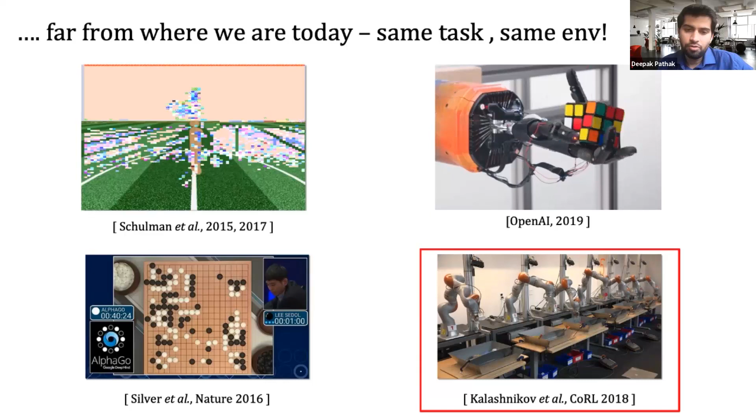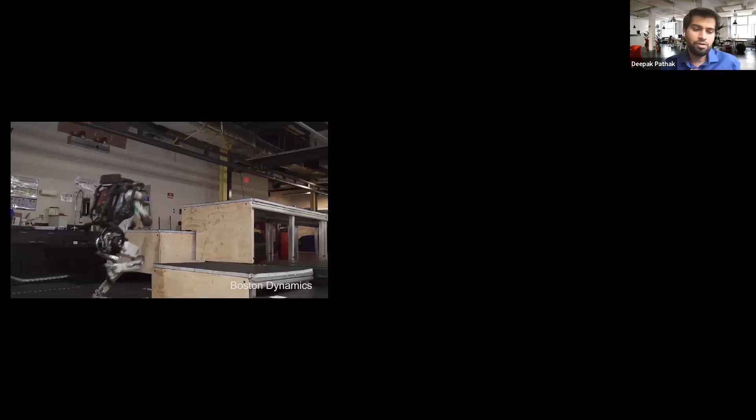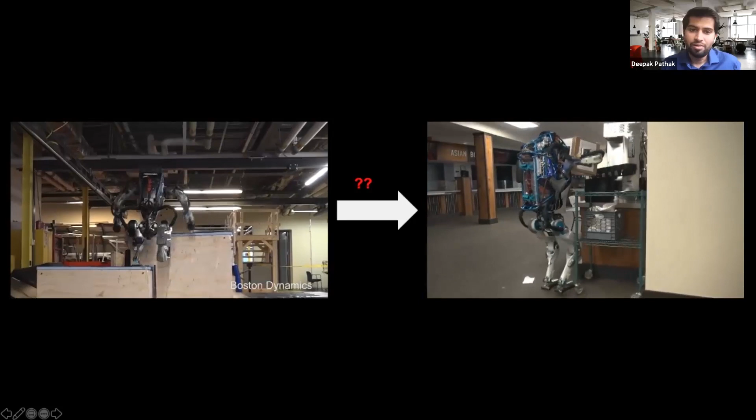And whenever this assumption gets violated, our models fail to generalize. This problem is more apparent and a bigger one in robotics. Extending the same analogy to control, here we have a robot that can do lots of parkour tricks, but apparently fails to generalize to a simpler task of just putting a box on the table. And the failures in robotics are more catastrophic and can cost you thousands of dollars, unlike classifying a wrong image in ImageNet.

So what I believe the major problem is not getting something to train, but to generalize beyond training and have it function in the real world. In today's talk, I would like to argue that probably the only scalable solution to this problem is to keep adapting all the time in a lifelong manner, as is the case in biological agents. We want to go from this current paradigm of training, freezing weights and testing, and then just hoping that things will work at test time.

What we want to do is build systems that can adapt rapidly and continually. In today's talk, I'll talk about some approaches that can go from this paradigm to this continual adaptation paradigm. This basically boils down to the question: how do you computationalize the idea of adaptation in a way that is scalable and practical?

For the purpose of today's talk, let us break down our original goal of solving thousands of tasks in thousands of environments into two concrete subproblems. The first is how do we build agents that function within the same task but generalize to lots and lots of diverse environments. The second focuses on the same environment but generalizing to diverse tasks. This is a very natural separation. If we want robots to be general purpose and embodied, we want both, but breaking the goal into two subproblems helps us study them in a more scientific manner and build algorithms in the first place.

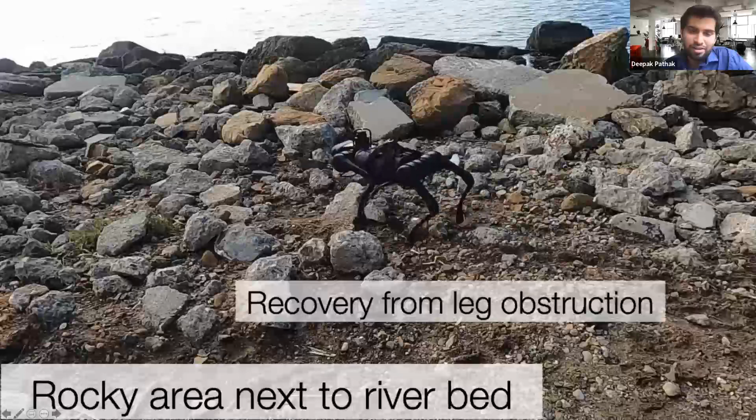Can someone confirm if they can hear the volume? Yes, we can. Okay. I was asking because I put the earphone on.

So here we see the robot walking on the rocky terrain next to the river. And as you saw here, the robot actually was able to avoid obstacles by incrementally moving its leg upwards until it avoids the rock. And I'll come to this more in the result section.

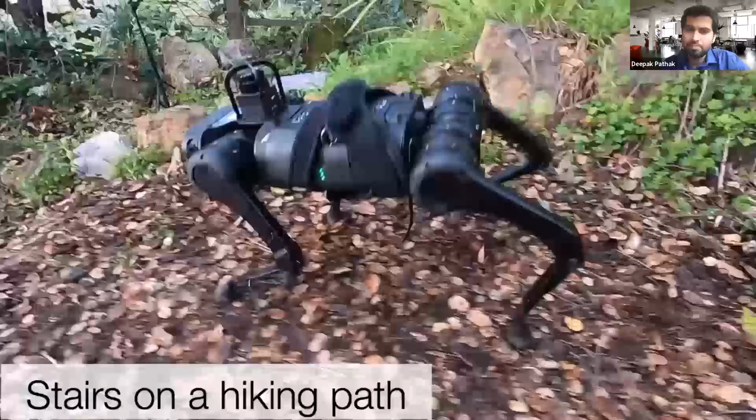Here is one more example of a robot going down the stairs. Note that this robot was never trained on stairs. And this is a test time result where we introduced the robot to the stairs for the first time.

Now, as I said in the beginning, the robot is blind, but even if the robot could see and was not blind, it would still need to adapt to things which are not perceivable. Like if we see this example, the robot has to avoid this dip. So in this patch, there's a certain dip. And the only way to avoid falling from the dip is to be reactive from your own sensor input. And vision would not have helped here.

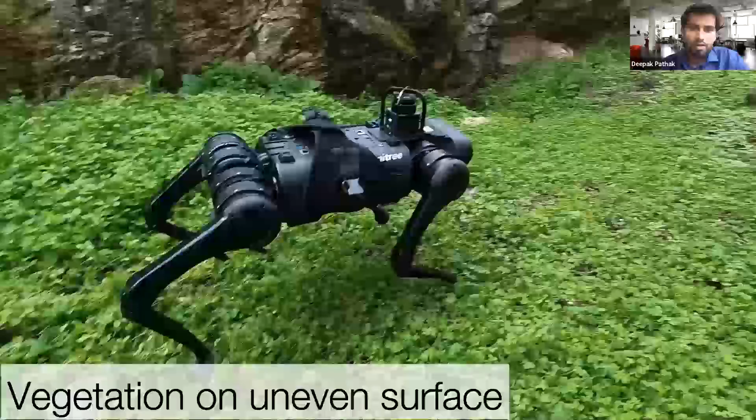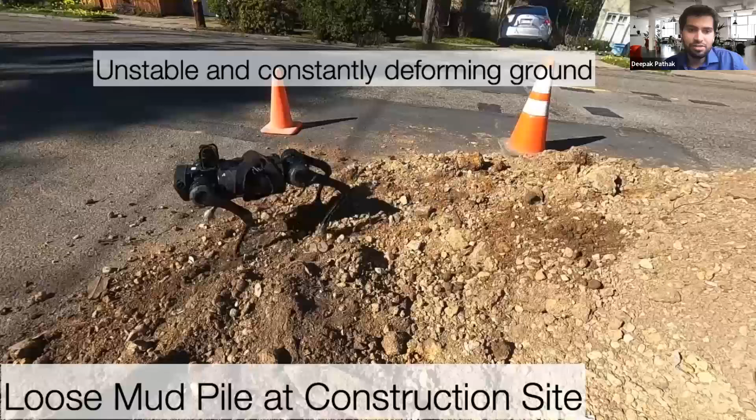Okay, one more example of robot trying to walk over vegetation. One more example where the robot is trying to walk over unstable ground. And you can see this is a construction site and the legs of the robot are very thin. So as it moves, the ground kind of deforms. So it's difficult to adapt in this scenario.

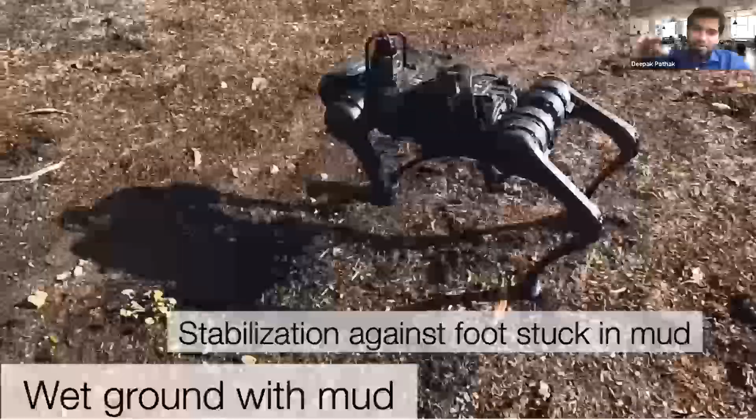Here is one more example where it's walking on wet mud and the mud sinks into the ground as you put your feet into it. So you have to reactively adapt at a very high frequency to such changes. And here is sand. Now, sand is not very hard for humans because we have a very large surface area on the feet, but this robot has a very low surface area. So sand is also acting as a deformable ground.

And finally, to emphasize the point that all the results that we saw so far are from a single policy that was deployed without any modification or tuning directly in the real world. And one funny part here is that in this project, we spent a lot of time in testing. So this whole testing was done during the pandemic and spread over like 2 months in the real world.

Okay, so now let us see what is the key idea behind this approach. And the approach is super simple and straightforward. And the adaptation part is the main interesting portion here. So I'll quickly describe the approach and then we can go to the analysis of the approach. And I can take any questions in between again.

So how does it work? Well, you would like the robot to walk as well as possible. And as I said earlier, the robot is trained completely in simulation. So in simulation, we want the robot to take the current state and its last action, and output the next action that it should take to move forward.

Now, the way we train this robot is so that it can work really well. So we feed it the ground truth information of the ground. So we feed it the mass, center of mass, friction, terrain height, and motor strength, and all those information. And we feed that via a network, which encodes all this environmental information and passes it to this base policy.

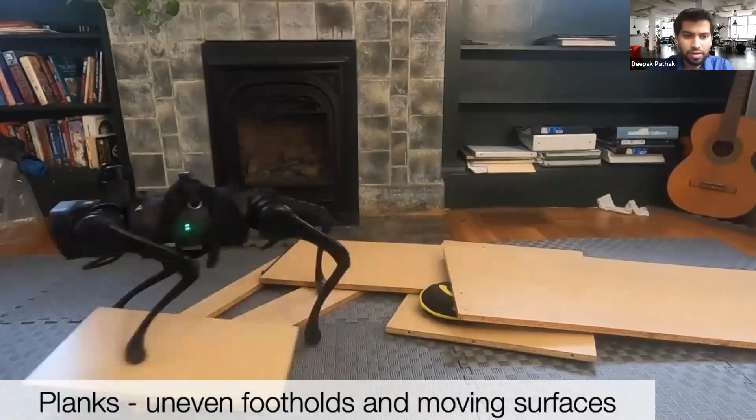one example here is the plank is moving with the robot forward. So this online adaptation is really helpful in these scenarios. One more, here is a mattress. So we put the robot on the bed and it can walk forward. I'll show more, longer examples below. But the key thing in the mattress is you don't get force feedback on the legs, because the mattress depresses as you put feet on it. So this is really a hard task.

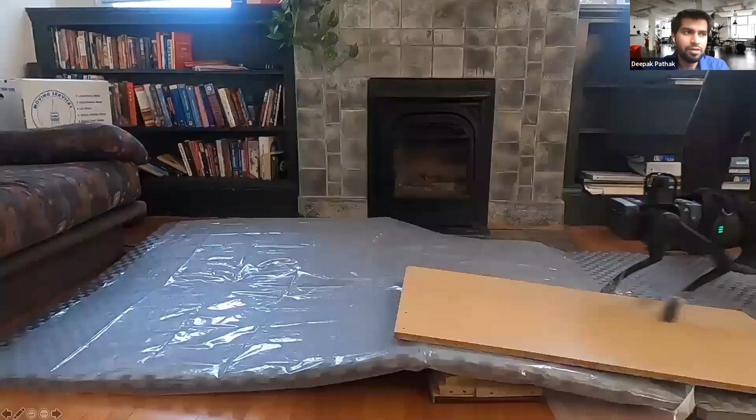One more example here is this robot trying to walk over this terrain. Here is a plank, the surface is oily, and you're throwing weight on top. I'll show each of these examples in more detail with respect to an analysis. But we did a very thorough investigation of this approach and it really works in diverse scenarios.

Okay, so let us see here. Let us first compare this approach to A1's built-in controller. So far I was talking about all learning-based methods, but now we would like to compare how well this method works with a control-based baseline. Now, it is very common in control-based methods to assume a leg motion, a very sine wave-like motion like this, because locomotion is a very periodic thing. So you can actually parameterize it very well.

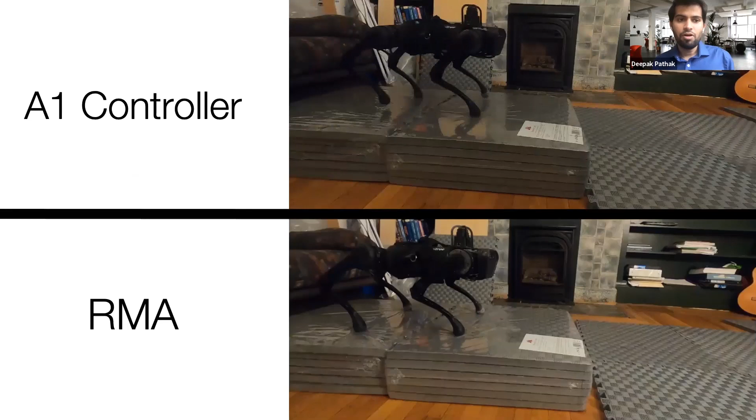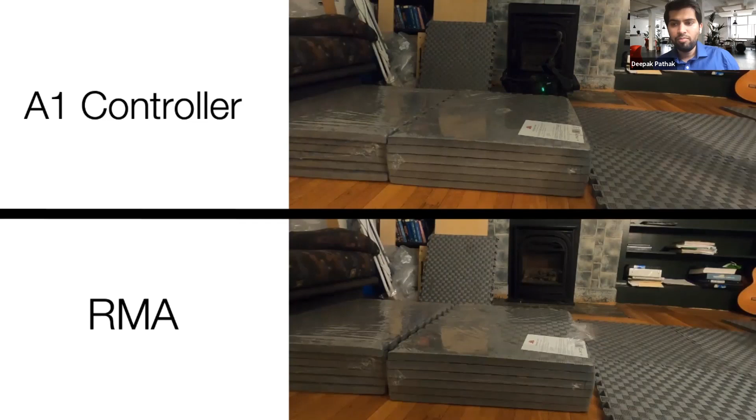So here is the comparison to the controller that comes with the robot. On top, you have this robot; it kind of falls when there's a sudden dip, and bottom is RMA. It also encounters an unstable foothold, but it is able to maintain its balance and move forward. Here is the opposite, you have to go up, and note the robot is blind here.

So that behavior that you saw, it actually learns to move its leg up to avoid it, since it cannot see the obstacle. So it has learned this behavior using the leg as a stick. And here is the mattress. Now you may ask, wait, why is it just jumping around? Because the mattress gives very erroneous feedback on the leg force sensor, which usually completely throws off any classical controller. And here is RMA.

Now this was a comparison to classical controllers, but let us see how critical the adaptation piece is, or is the base policy strong enough? So here the top row is our method, and the bottom row is without adaptation. What that means is we still adapt, but we only find the extrinsic vector once in the beginning and then keep it frozen. In the top, we estimate it continuously online.

Okay, so let us see the testing. The testing here is not just walking, because walking is easy. Walking can be done without adaptation. So here we put an 8 kg payload on the robot.

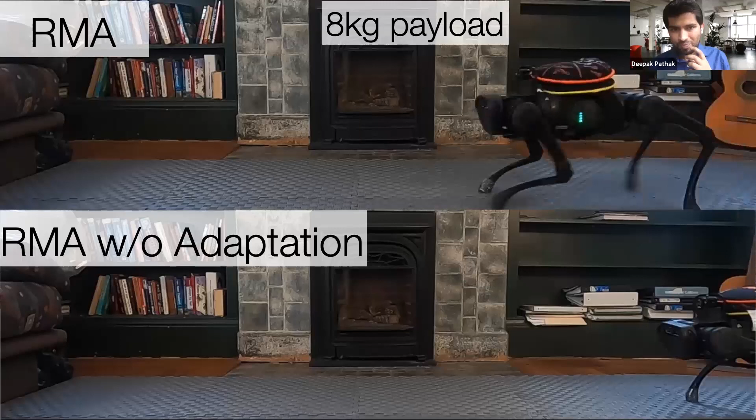Now 8 kg is really heavy. So if you try to walk with 8, so it's not 8 pounds, it's 8 kg, so it's really heavy. And the robot itself is 12 kg. And we did not have this weight on top in simulation. I think in simulation, the range is up to 2 to 6 kg or something. And we are testing already out of the domain in training simulation.

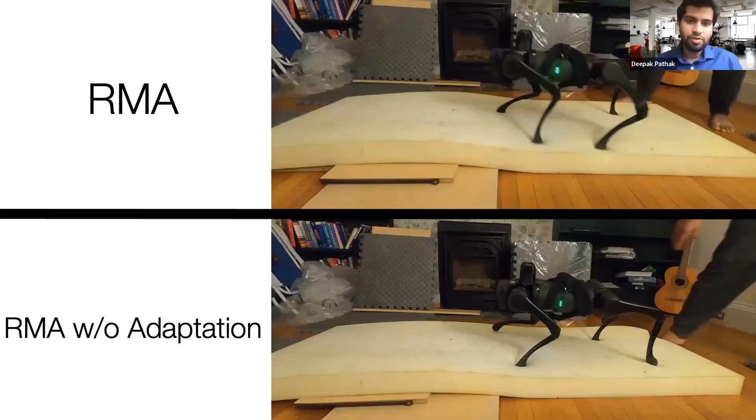And so this is a very hard fall. I don't know if you could hear it. And if you notice, the policy did work for the first couple of seconds, but then since the adaptation module was not adapting online continuously, it failed to generalize. Here is one more result. So it can easily walk on a mattress, but without adaptation, it fails to generalize and kind of falls after a few steps.

Let us also analyze this adaptation module in more detail. So Deepak, do you mind if I ask another question? Yeah, okay. Jeff here again. I apologize if I'm slow in the uptake, I'm trying to make sure I understand. Is the idea that there's no weights changing during adaptation, that the encoder, which is a function of recent data, will adapt the Z code to try to predict what is the Z code of the current world that I'm in? And with that different Z code, the policy adapts to that world, but there's no actual weight changes going on during adaptation.

Is that correct? Correct. The way this encoding goes to the network, it's a dot product. So you can think of Z as weight, or you can think of Z as input. So Z is changing, it's an input. The base policy is not changing. Yes, you're right. And the weights that transform the historical data into the Z vector are not changing, but Z itself is changing. Correct. You could make the analogy that this is a little bit like the Rubik's Cube work from OpenAI, where that network figured out how to internally, within the recurrent neural network, update its assessment of Z. Here you've factored it out a little bit more manually.

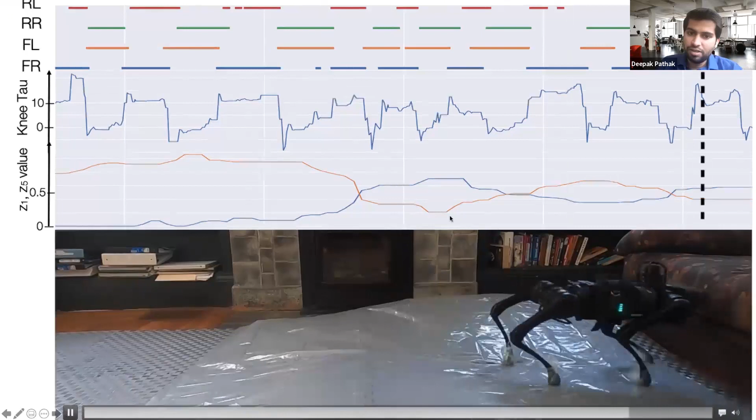And here is to Jeff's initial question about what is Z encoding in the latent space. What we found is that the Z encoding, or this extrinsic encoding, is not encoding the parameters explicitly, but it is encoding some basis of them. So in the oily surface, this is 8 dimensional, we are visualizing 2 dimensions, Z1 and Z5. And you can see as the robot walks, they change behavior. So it is indeed that these parameter values are changing as the robot is adapting, and that helps it adapt to new scenarios.

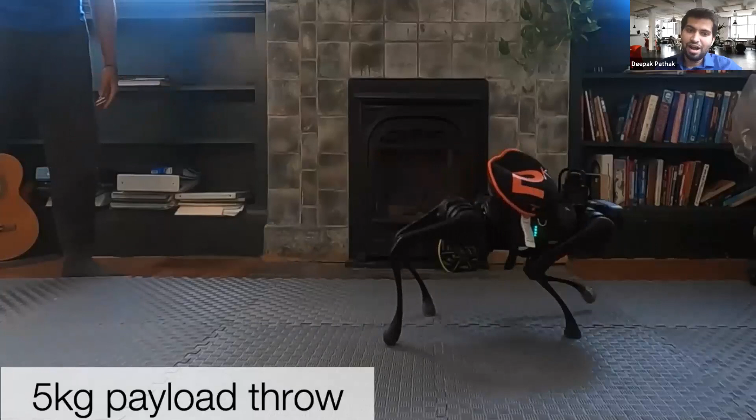So this is one last example here, where we are throwing a 5 kg weight on the robot while it is walking. And note that this throwing behavior was never shown in simulation. And 5 kg is kind of a large weight. So I did this experiment with my students at the lab. While they're walking, I didn't tell them that it's 5 kg. I just threw it at them, and they were actually quite surprised how hard it is to catch while walking. And here it is in slow motion.

So notice how the robot bends down when the weight comes on top. And again, this behavior is in a way emergent, because this throwing is happening at test time, and the objective of not falling has led this to happen. So here we are visualizing some other values like Z2 and Z7, and you can see the change in their behavior as you throw it. They both are similar in the beginning, and as you throw the weight, one becomes high, one becomes low.

Okay. So now quickly to summarize. I think Jeff mentioned the hand work, that is definitely one of the works. But even in the locomotion community, there's a lot of work done over the years. For instance, work in control for locomotion, learning for locomotion, also sim to real for locomotion from this lab, and adaptation, meta learning, and all that.

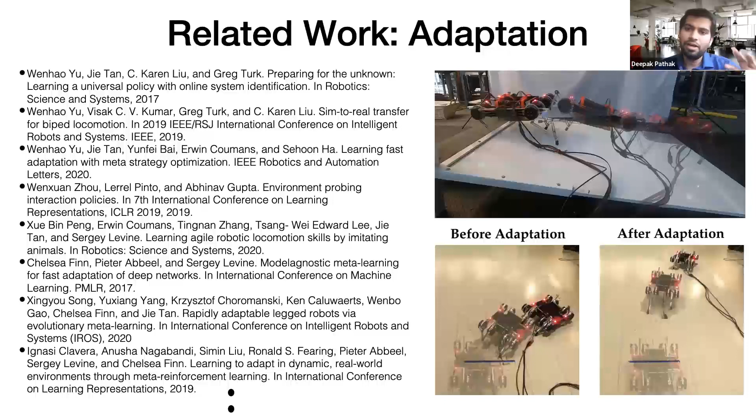So we compared this method to different types of approaches, like domain randomization, where the idea is to be robust across all environments, and system identification, where you don't have a Z vector and you estimate the exact friction and all those values at test time. And also other methods that adapt at test time, but they take more samples, like 3 to 5 minutes of data. This is like Jason Peng's work, for instance. And it turns out that RMA works much better compared to all of these approaches.

And we did the testing not only in simulation, but also in real world very thoroughly. And I would like to emphasize that the testing was done in real world, to an extent that the robot broke multiple times while testing the baselines. But this is what I'm a big proponent of: we should be doing full thorough testing in the real world and not just in simulation.

So in the context of all this prior work, what is exciting about RMA? I think the most exciting thing personally for me are these 3 points. One is this adaptation happening online without having any hand-coded or heuristic control stack at the bottom. So we are not assuming any predefined leg trajectories or motions. Then it can generalize to new terrains with limited training. And then this asynchronous design, this 2-phase design, which allows us to run this in low compute scenarios.

But focusing on the first point here, so just a question. Okay. So yeah, it's also about the first point. So why do you think a hand-coded heuristic will be harmful to your task if you use it, or why is it beneficial to not use a hand-coded one? I'll just come to it in a couple of slides, I think the discussion will answer it automatically.

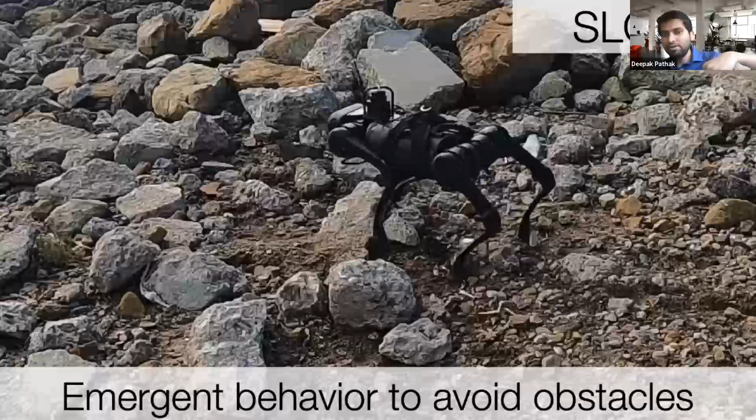Okay, thank you. Okay. So here, since the robot is blind and it does not have any foot patterns or any pre-hand-coded thing, it has learned this behavior of avoiding obstacles by slowly moving the leg upward. So this is one of the benefits of not hand coding. If you look at it in slow motion, the robot has actually learned to slowly move the leg upward while it avoids the obstacle. And we found that this behavior is very consistent across environments. So here is one more.

Okay. I have a follow-up question on that. I'm not sure if you're aware of ETH Zurich's work that's similar. I believe they're using a predefined sine wave for the leg, and they can deal with this scenario pretty well. So I don't see why that would be a problem.

Oh, so I think in their case, the robot is actually very high. It's a big robot. And by the way, that work is great. I'm really a huge fan of the work, so nothing bad about it, I have only good things to say. But still, they can avoid this because they have very high clearance. And when you have very high clearance, your gaits are really energy inefficient.

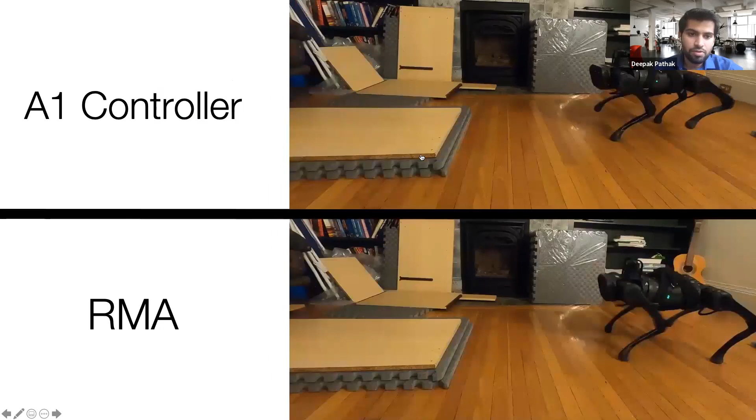For instance, look at this example here that I showed earlier, on the top. I can play the video. With this kind of gait, if you have high clearance and the obstacle is not that high, then there's no problem. But if you have an obstacle which is higher than this, then what will you do? There is only a limit until which you can avoid the obstacles, right? So in their case, I think the obstacles that they show are mostly where the clearance takes care of it automatically.

Anyway, the right approach here is neither theirs nor ours. I think the right approach is to have vision and avoid the obstacles intentionally rather than via these heuristic mechanisms. But the bigger reason for us not hand coding things is not really these practical reasons, it's more of a philosophical one.

What we were really inspired by is work on studying locomotion in babies. For instance, there is this work from Karen Adolph, a professor at NYU who studies locomotion in babies. She's a world authority on motor development in kids. She's also the student of Eleanor Gibson, who did the famous visual cliff experiment with babies, and who was the wife of J.J. Gibson, a huge authority in computer vision.

Now, one of the papers that I really like from Karen Adolph is this work studying locomotion in kids, where she argues that the locomotion patterns in kids do not fall into a predefined notion of gaits or leg primitives. In kids the locomotion is more general, and there is no stage in their development where these regular patterns are there, which is a surprising result because it is countering 100 years of work in biomechanics, where people have completely focused on gaits.

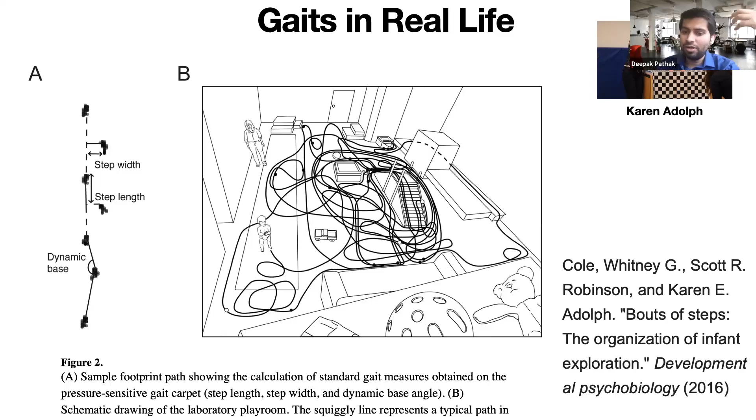And also we kind of know that this is not completely true, because in animals we have seen very structured gaits, like walking, amble, pacing, trot, etc. And this has been studied very well in horses, where these gaits emerge. So there is kind of a mismatch; both of them are natural behaviors. In babies, we don't see those gaits in complex environments, but in horses, dogs, cats, elephants, we see these gaits. So how do we reconcile both of these stories from a scientific point of view under the same framework?

Now, one point to note is that whenever these gaits have been studied in animals, they have been studied in the context of flat terrain, where these gaits are structured, while the argument from Karen Adolph is about uneven and complex terrains, where the gaits are unstructured. And what we would like to do is reconcile them in the same framework.

And one way to do that is to basically hard code the gait. But if you hard code the gait, as someone asked in a question, or foot patterns, it is very difficult to reconcile this story. How do you get unstructured behavior in uneven terrains, right? So before we reconcile the framework, let us take a step back and think, why do these animals have these gaits in the first place? What is it about them that makes them show such structured patterns?

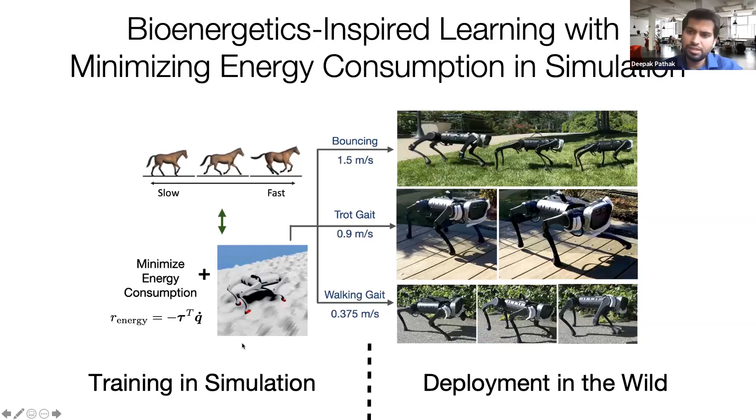Okay, so it's the same scenario, but in the first example we are training on a simpler terrain. Note that this terrain is not as complex as the earlier one; it's almost flat with some bumps. And here are examples of the gaits that have emerged. Note that if you see the gait pattern here, it is not unstructured like the RMA I showed before. It's actually a very regular walking pattern. But these gaits have emerged here and are not hard-coded.

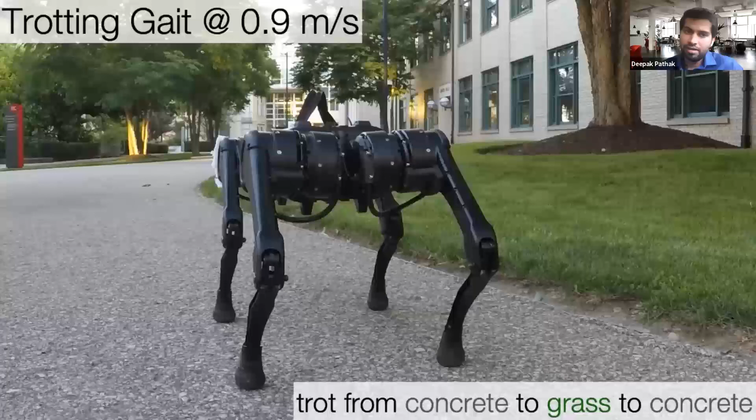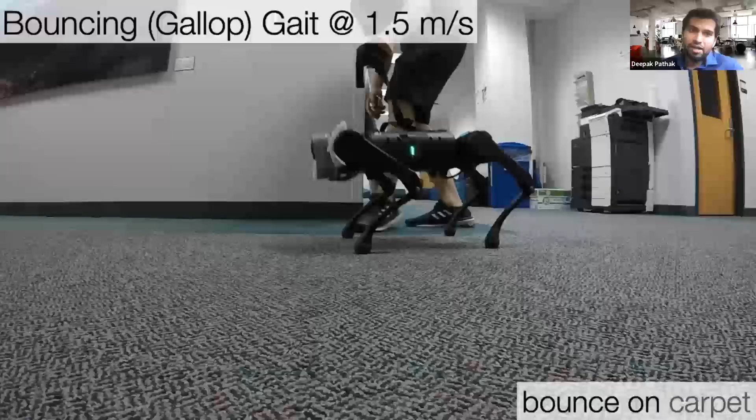Now, if you take the same algorithm and change the speed, same thing, no change, just change the speed, the gait is different. So now it's trotting, where the hind legs track the front legs. Again, if you change the speed to even higher, it starts bouncing and galloping forward.

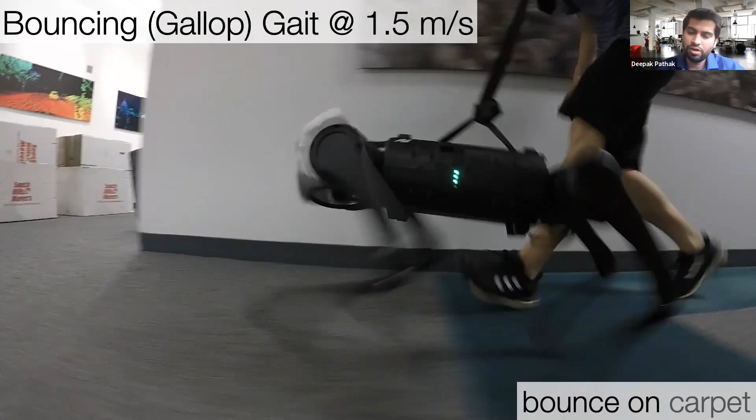Now notice that one can hard code these gaits for different speeds manually, but that's not the goal here. Right? The goal here is something that automatically changes gaits as you change the speed and is emerged from scratch. And I hope that this kind of answers the question that was asked about pre-programmed gaits.

One interesting thing that we found here is that the flight phase has emerged in this robot. So if you see this robot, it's completely in the air. And this is something which I found out later that controls people really appreciate, like this gait of all being in the air, because it's very hard to get, where you have all feet in the air.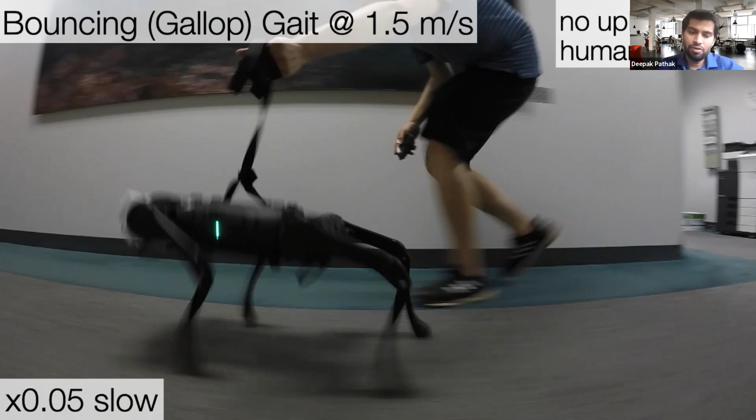And here's a quick illustration. So at low speed, it walks. And here we are showing the classical way of showing gaits, like foot patterns in a graph laid out in a 1D series. At trotting, it's a different gait. So let me skip this in the interest of time.

Just a quick question, if you don't mind. So what energy metric are you using here? Because there's a variety of different energy metrics. I think we are using work. There's true mechanical work. There's positive mechanical work and negative mechanical work. Have a field day with all this stuff. Yeah. So we did the simplest thing we could implement here.

So we did pure mechanical work. So we just minimize the mechanical work done by the robot. So it is not counting the electrical compute the robot is using, which I think is what biomechanics prefer, or they call it, like, transport energy or dimensionless energy term. So the negative mechanical work, does that count against the energy objective, or does that count as energy stored that you can then use again?

And so we are basically computing, I think, the dot product of torque and the angular velocity. So you minimize that for all the joints. Okay, and that's integrated. So that can be negative. So in principle, you can store that energy somewhere. And that's the drawback in some sense of using pure mechanical work.

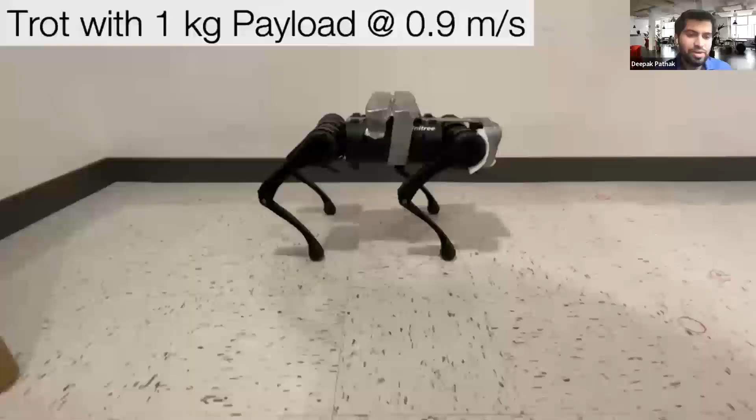Okay. Here are some examples of these gaits. Here we see the robot trotting through this scenario and moving forward. We also did the same testing as before, but at this time I had moved from Berkeley to CMU, so we did not have the same weights. So we became creative, and we put filled water bottles taped onto the robot to have this payload on top. And the gaits are consistent and robust to all these variations.

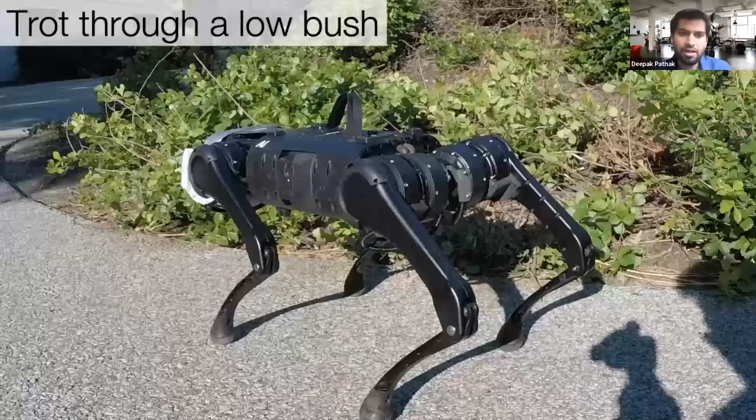Here is one more trotting through the bushes, one more bouncing through this. Now this is actually very high speed, so the robot goes away very quickly. So the student has to really jump around with the robot.

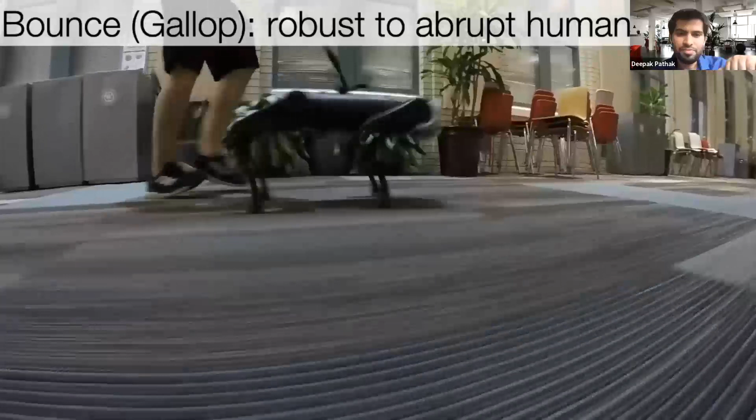And here the student is pulling the robot sideways and also pulling it upward. So if we see here, even when you pull it sideways, it's almost tilted, it can maintain the gait at such a high speed. And then similarly for pulling upward as well.

Now, if we repeat the same experiment on complex terrain, like here, in this case, and it is also argued by other papers in animal locomotion as well, that in complex terrains, the horses, dogs, sheep, they do not display structured gaits. They only display structured gaits on flat terrains. And here we do the same thing.

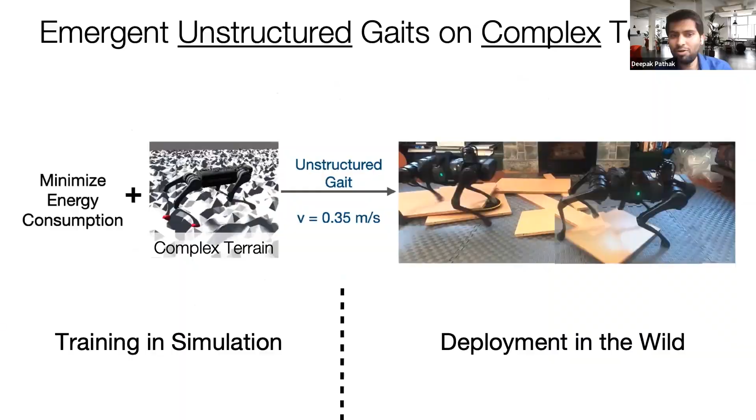So now maybe I have a question here: should we go with part two, which I think is much shorter, or should we just focus on this and have it understood in more detail? What do people want? Let's see. Yeah, I mean, it's the usual Zoom dilemma. I think there will be people who have hard exits and others who don't. And Aaron, as far as the recording goes, does it matter for you? No, we can go as long as you're available. Yeah, but let's try not to keep it too long, I guess. Thanks. Okay, so let me just do it real quick.

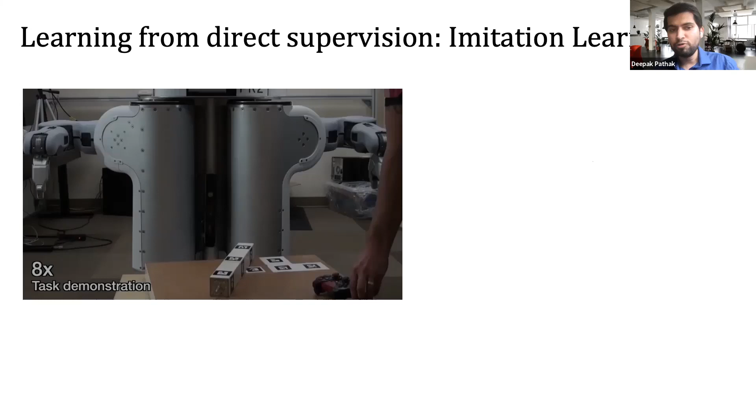So this was same task, diverse environment, and now focus on same environment, diverse task. I'll go super fast on this, but stop me if you are not following something. Before I talk about diverse tasks in the same environment, let's consider how we train an agent to solve a single task in the same environment. The most common approach is imitation learning, but we all know its drawbacks: you have to collect data, it's tedious for the expert, and this has to be repeated for every new goal the robot is given.

Furthermore, other approaches like learning from a reward or cost function, like RL, have the same problem. You have to design the objectives and reward function again and again for every new environment. So if you really want the robot to generalize to a diverse number of tasks, it would be most ideal if the robot can discover those tasks on its own, kind of like self-supervised learning. And this is the focus of one of our recent works, where the problem setting is we want to discover tasks at training time and then learn how to solve your own discovered tasks.

And then at test time, the hope is any new task the user gives you, you would have discovered already at training, so you can just do it at test time directly, zero shot. So it's unsupervised task solving without any supervision, neither at training nor at test. This problem of unsupervised exploration has been studied a lot, including my own past work like curiosity. But the major problem with all those methods is twofold.

One is, even if you can explore very well and get the skills, there is no easy way from that unsupervised exploration to actually solving goals at test time. And second, the exploration itself is very limited. Let me show you a demonstration of why that is the case. These are examples of the most pervasively used methods in exploration, like goal generation, self-play, counts, curiosity, and all this.

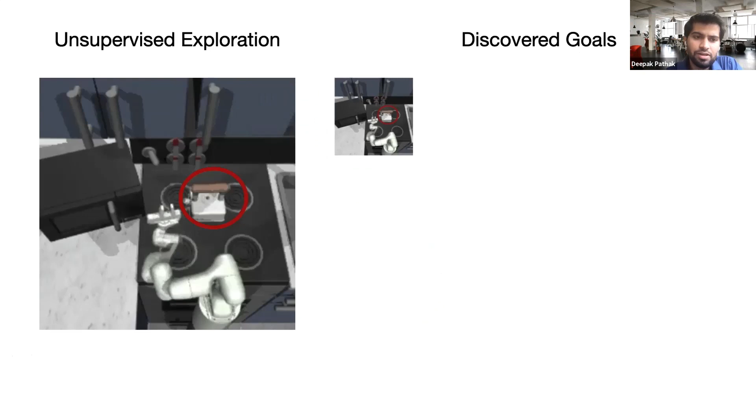So let me quickly show you some results here. So here is this complex environment where this is again all torque joint angle control. So there are no primitives, etc. So this is a hard problem in this environment, to do anything like move the kettle or open the microwave. And here is a demonstration of the exploration trajectory. So here the robot goes and opens the cabinets completely on its own. It opens the microwave, turns on the light, moves the kettle and all that. So it discovers many goals during training.

Then at test time, you can have the agent perform different tasks, and you can give it a diverse set of goals. So for instance, the nice part here is that we train a single policy only once, but at test time, we give it lots and lots of goals to achieve. We can ask it to make shapes with the body, organize the blocks, or open cabinets, or do other things. So let's see one example of this task here.

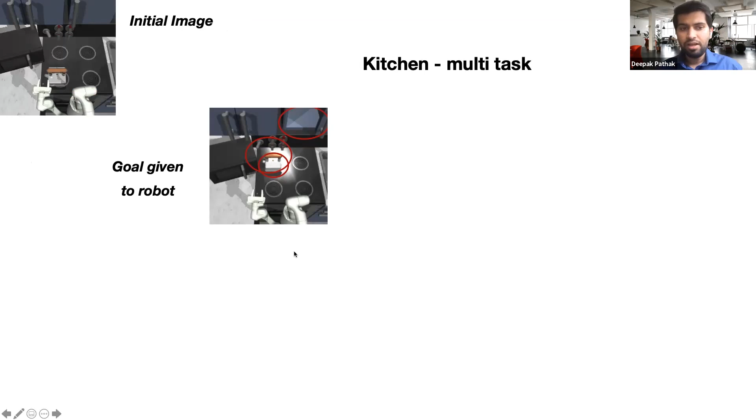So this is the initial image, and we show this robot this goal image. And in this image, the cabinet is open, the light is on, and the kettle is moved. Note, the robot has never been supervised, neither at training nor at testing. And it sees this image, and it tries to match its current image to this goal image. So in doing that, it moves the kettle, it turns on the light, and then it opens the cabinet.

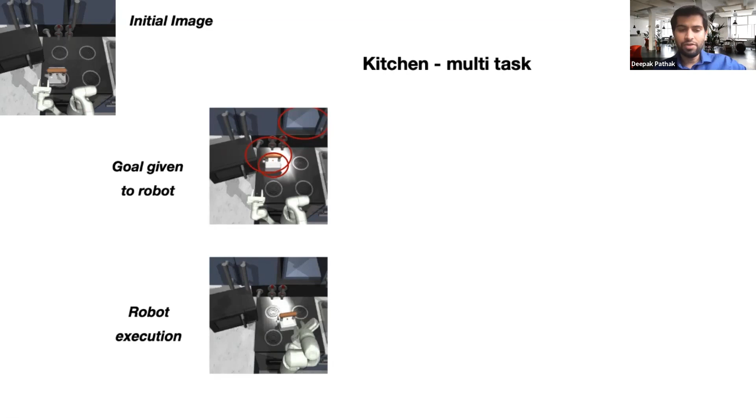And this is completely zero shot. And this is like thousands of actions to be done in sequence to figure this out. And okay, it can also work in more environments.

Can I just ask a quick question on that? So if you have a cabinet with a small handle and you have no idea that a handle is an affordance, then it's going to take a lot of random motion of the robot, like years, presumably, before you discover that if you put the gripper through the handle and then you pull, it opens. So aren't some of these things a little bit too much like looking for a needle in a haystack?

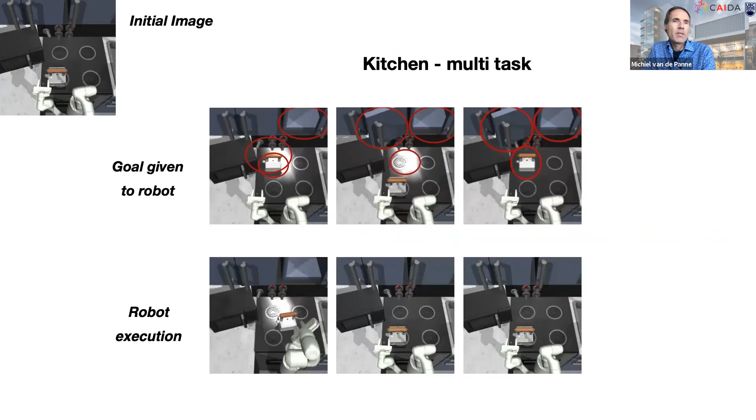I totally agree. The way I think of this work is it's going beyond the current exploration methods, including my own previous ones, in being able to discover goals in these complex environments. For instance, I have not seen a result in this kitchen environment, which is actually a complex environment in some ways, which does not use demonstrations or very shaped reward functions. This environment is already hard with shaped reward functions and demonstrations.

So I don't know what the limit is. I know that this approach is not there. If you have a very complex environment, it's exactly like discovering a needle in a haystack. So it might not generalize, but we are still trying to figure out the limit of this approach, how far it can go. But I bet you Go Explore could solve that problem, all those needles in a haystack, because it's so efficient in phase one. It doesn't have to learn to do it reliably. You can do it deterministically.

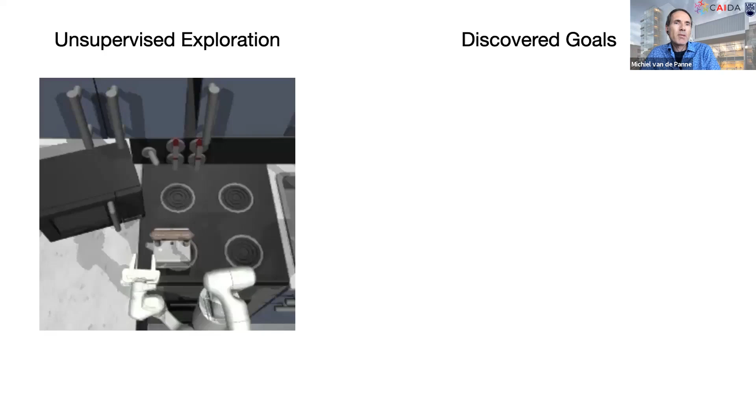Can I just, at some point, I do need to just try to keep, like, it sounds like these are great points for discussion, and maybe Deepak can hang on at the end. Yeah, I can. But we should be fair to the audience and let people wrap up. Okay. So I think these are very good questions. But let me just.

So here is a result of the robot trying to make the shapes at test time directly without any supervision. And finally, one I just mention quickly: we also train a single policy across all these environments. Since it's completely unsupervised, you don't really need to worry about objective clashes and the multitask thing. So this is all trained, and we can solve many of these across environments.

Finally, this is the end of the talk. I talked about learning from the same task in diverse environments. We talked about the adaptation piece here, and here about the goal discovery phase. And we kind of need interaction between these two problems to reach this long-term goal. But that being said, that is not enough. We need many other things like inductive biases from control. So far I was emphasizing that the robot is not using any control abstraction, etc. But I don't mean to say that we should not use one.

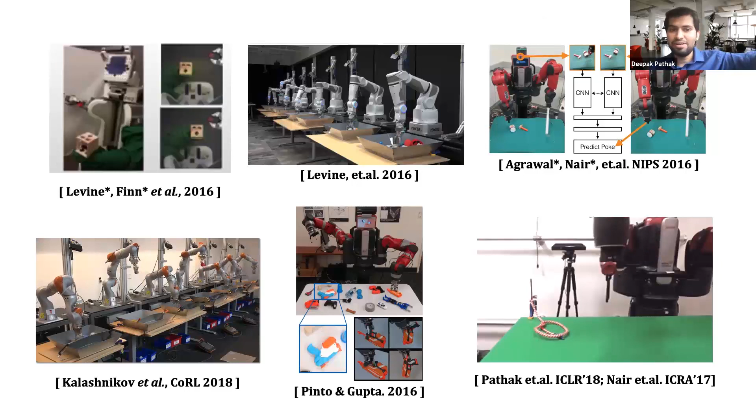One big thing is that these robots today are kind of quasi-static, as in they can take forever to act at each step, while the real world is dynamic, and control has a lot of work in trying to model dynamic tasks. So we are also, in parallel, trying to integrate control approaches inside the deep network. In particular, the famous work on DMPs, which are very popular, and we put them inside a deep network and learn end to end.

So again, as I promised in the beginning, this talk is not a high level talk showing 10 papers. I wanted to focus on one thing really in detail. And here is a quick acknowledgement for all of this work. The first is Ashish and Zipeng, then Russell and Oleh for the goal discovery. And the control part I showed very briefly is from Shikhar. With that, I'll just end here and say thank you to everyone.